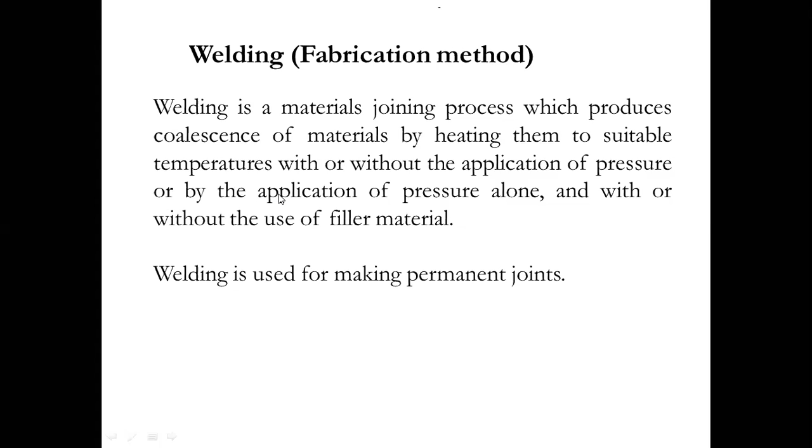So the next slide is the classification of welding process. The classification of welding process is based on the force or heat, based on the pressure or force you apply. If you use an electrical circuit, you call it resistance welding.

We had done one experiment called resistance welding. Do you remember spot welding? Yes, spot welding. So if you use an electrical circuit, and two copper electrodes, and if the joining process is due to the resistance towards the heat, you call it resistance welding.

If you use electrical arc welding, there are different welding processes. We'll see it in the figure now.

All of you make a note. The basic classification of the welding process is of two types: one is fusion welding and the other is solid state welding. If you attend any interview, they will ask you the difference between solid state welding and fusion welding, so you must be very clear to answer them.

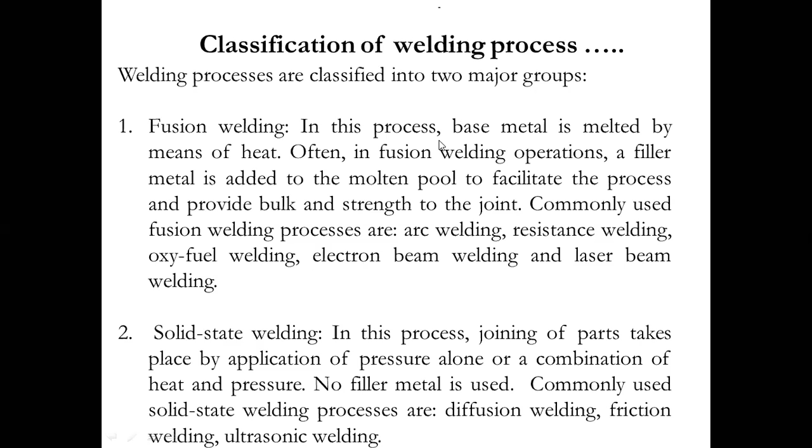This is not there in your syllabus. The chemical welding which comes under chemical reaction is thermite welding. So under fusion welding you have three types: electrical arc welding, gas welding, and chemical reaction.

Under electrical arc welding you have carbon arc welding, metal arc welding, and inert gas welding - that is TIG and MIG. Under inert gas welding, you use the gas here as a shielding material.

Shielding is nothing but protecting the welding area. Why do you protect the welding area? As the welding area is in a heated zone, because of the air, or contact with the electrode, or the atmosphere, there will be a zone called the heat affected zone. In this heat affected zone, there could be a change in mechanical properties, so you should take care that it does not alter the mechanical properties of the material.

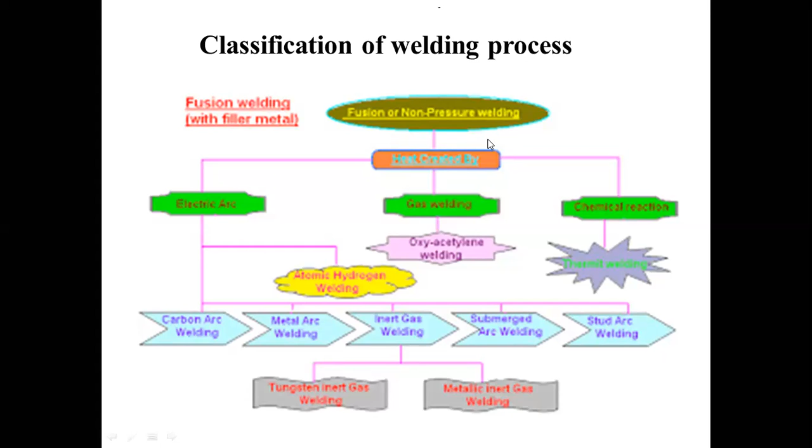Next slide is on gas welding and arc welding, the same thing is repeated here.

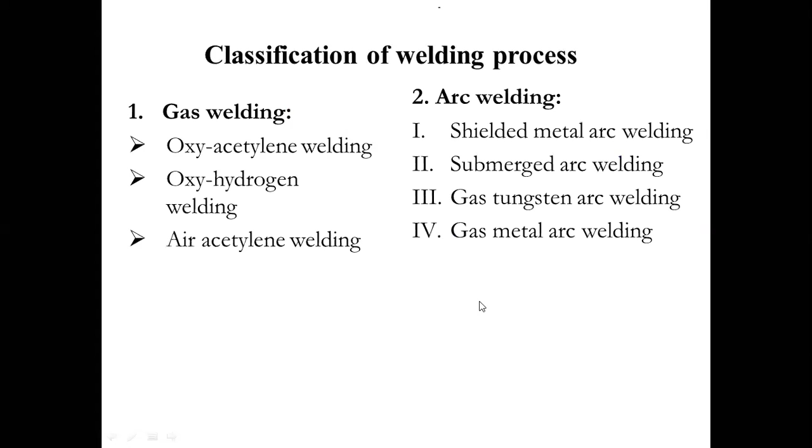Under resistance welding, you have resistance welding. We did one experiment using two copper electrode rods, holding two sheet metal plates under them. These copper rods were in contact with the workpiece, and you applied pressure by pedal. There was an electrical current passing through the copper rod, and because of that it heats up. This comes under resistance welding.

Resistance welding and solid state welding come under unit 4. In solid state welding we have friction welding, forge welding, diffusion welding, explosion welding, and the advanced techniques are electron beam welding and laser beam welding.

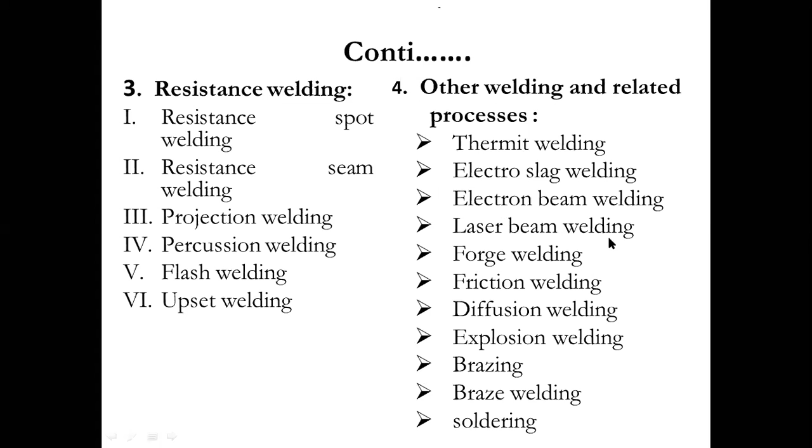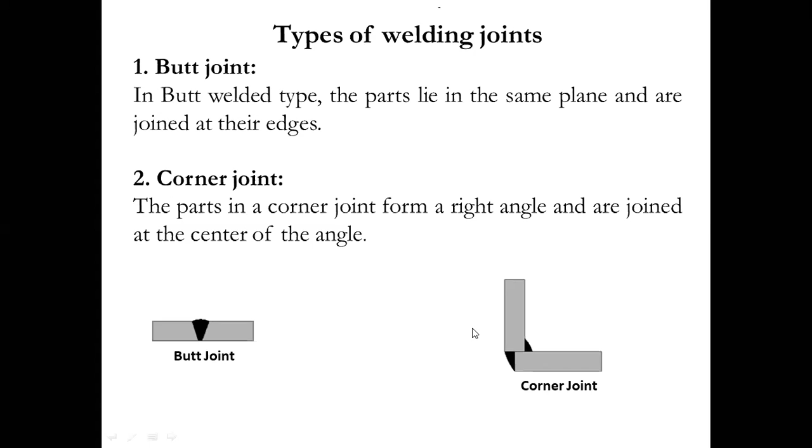In today's class we'll see gas welding. The next topic in this slide is types of welding joints. As we know, there are different types: butt joint, corner joint. In a butt joint you can give a V joint or U joint - the parts lie in the same plane and you join the two edges. In the corner joint, the two plates are at about 90 degrees. This is all we had seen in class.

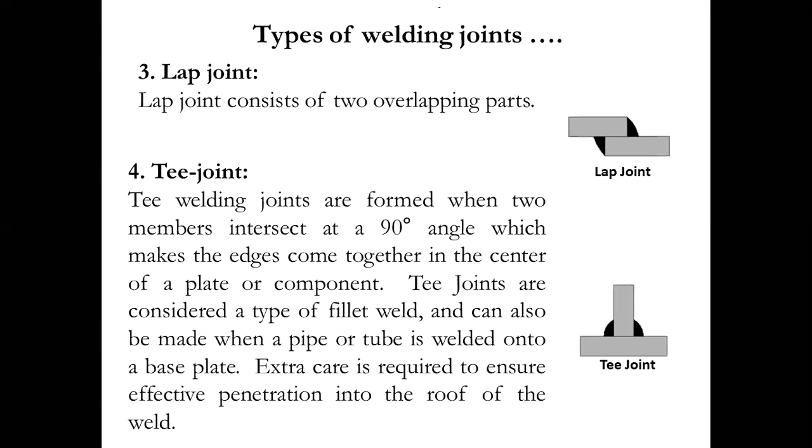Lap joint, two overlapping plates, which you did in spot welding - remember? T joint, please see the figure: T joint, lap joint. In the exam they may ask you to explain the different types of welding joints, so you should draw all these clearly: butt, corner, lap joint, T joint, edge joint. Everyone see?

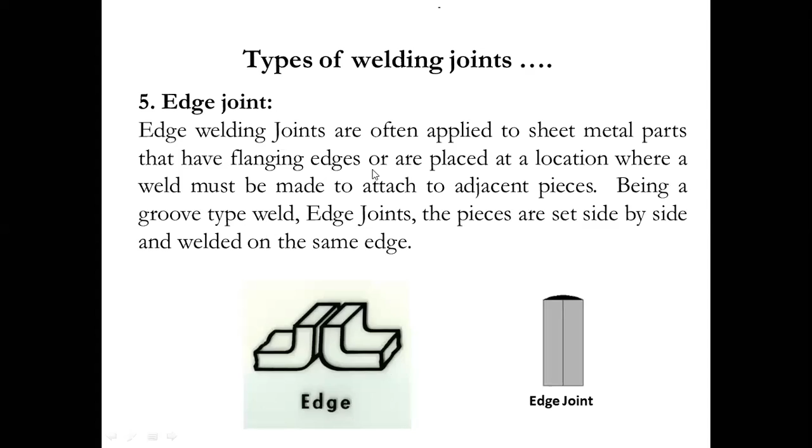And based on the position, there are different types of positions of the filler rod. There is horizontal position, vertical position, or overhead position. So based on the position, they will go for different types of welding.

So this is the welding terminology we had seen in class. Face of the weld, the bottom one is the root reinforcement, right? So this is the face of the weld, the distance between this edge to this edge.

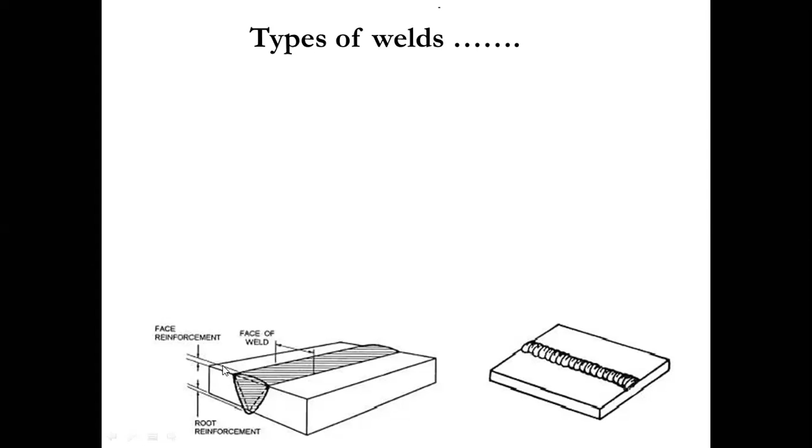All of you know this welding terminology. It's not much important, but from a knowledge point of view, you should know the link of the welding part.

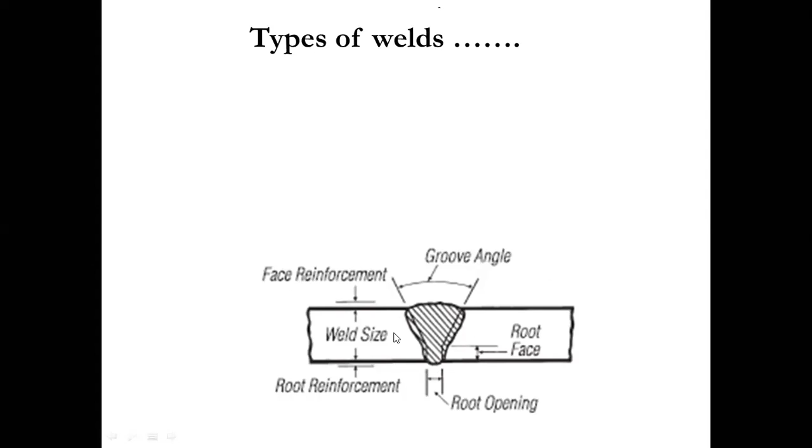So here you can see this is the welding area. The neighbored area, this area you call the heat affected zone. On either side, you will get two heat affected zones.

So the grains at the heat affected zone will start elongating from the surrounding or the edge of the welding area.

So in order to control this area, you will use the shielded gas, or you can use coatings on the electrode. And I think when you did electrical arc welding, the lab assistant sir removed the electrode rod, and it was written clearly that it was coated. So there will be a coated electrode rod to take care of this heat affected zone.

Right, so there are different types of weld. Please see this, this is a fillet weld. We had seen what is toe — toe is an intersection of the welded area and the base metal.

The intersection of two welded faces is root. So the two face, throat, toe, leg, root — all these are the intersections with respect to the welded area and the base metal.

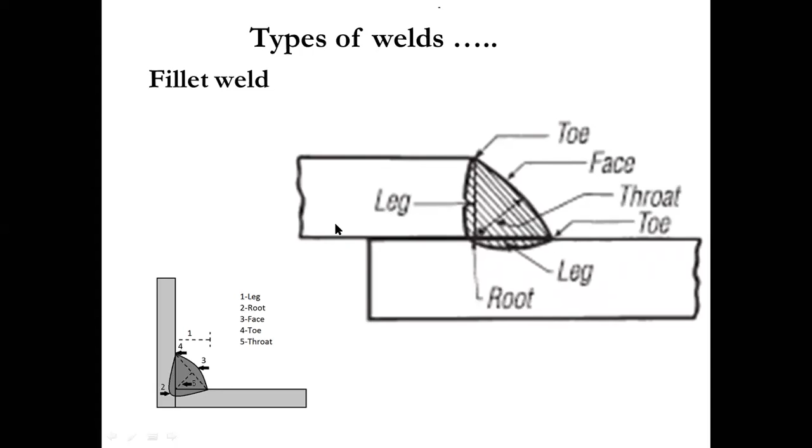So welding positions: flat position, horizontal position, vertical position, and another called overhead position. In this slide they have shown you the difficulty level, which increases from flat to horizontal to vertical, and overhead is very difficult.

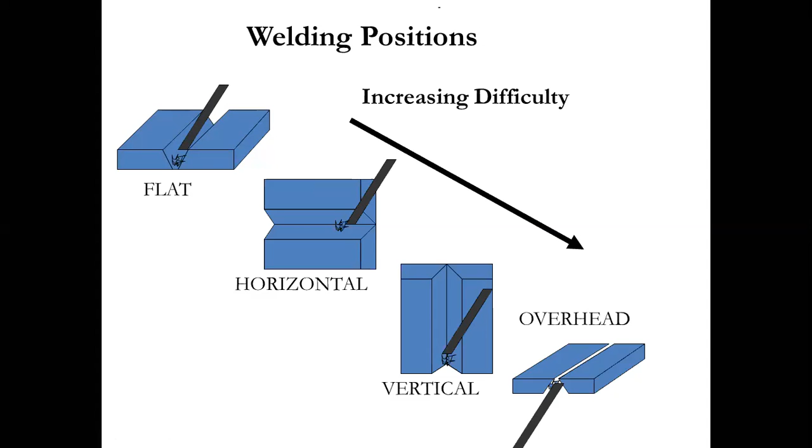So generally they do this overhead welding for the bridges.

So when you do the welding process, before doing it you will first prepare the welding joints, as we had done with 45 degree faces. So for the butt joint, you can do 45 degrees, single or double, single U, double U, based on the requirements they go for the preparation.

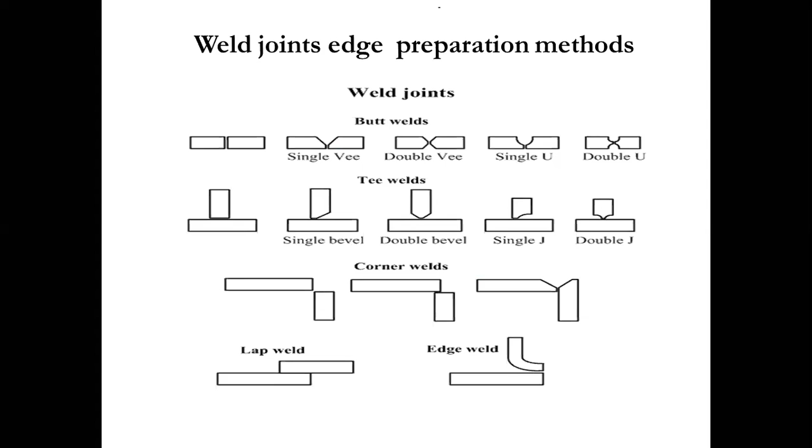Welding terminology, this we had seen: base metal, weld bead.

Yes, is it clear? Welding terms are not much important. Just see what is toe, what is the face or weld bead, what is root — all those, just see the definitions. They'll not ask you much from this.

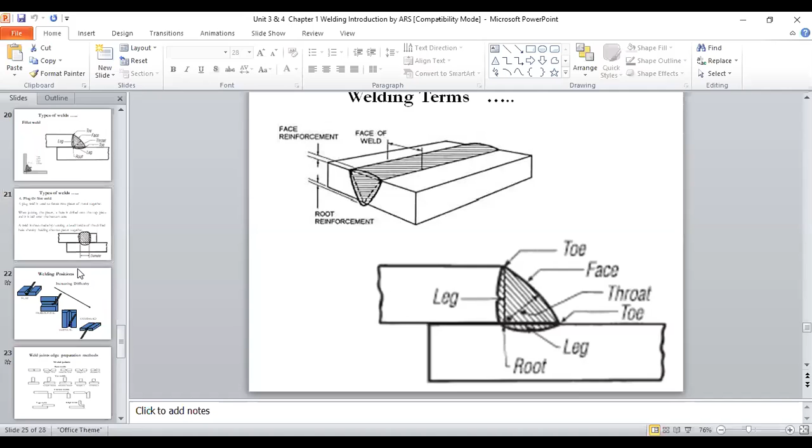Only they will ask you types of welding joints, or to classify the welding process. They may ask you about one welding method, either gas welding or electrical arc welding, but the main important questions are to classify or write the different types of welding methods.

Okay, so be clear, the definition of welding should be very clear. I always suggest do not write the definitions with your own words. Write the definitions from the textbook.

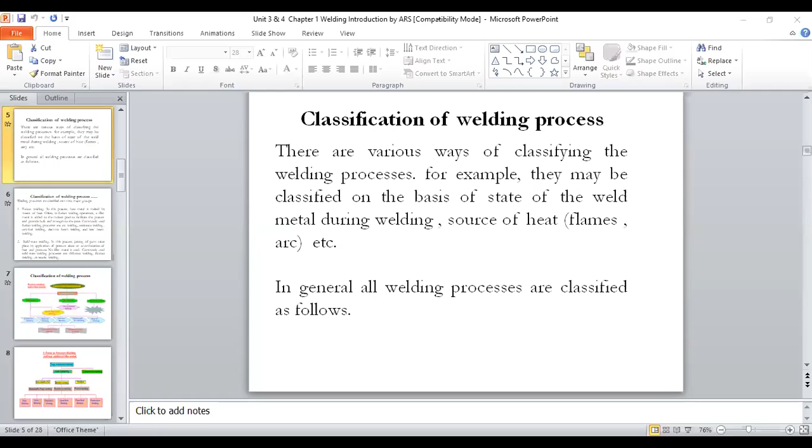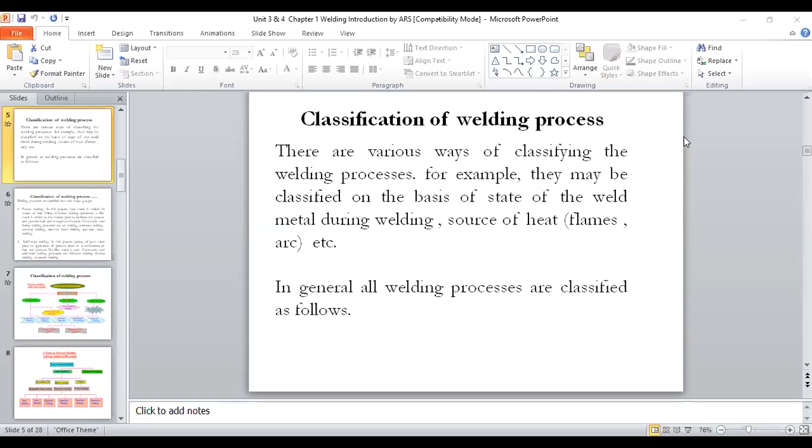So the next part in the third unit is gas welding. Can you all see this slide? Yes, ma'am. No, ma'am, okay, let me.

Can you see now? No, PPT is not visible. You share, how to share? Ah, now I got it. Yes, now? Yes, ma'am. Okay.

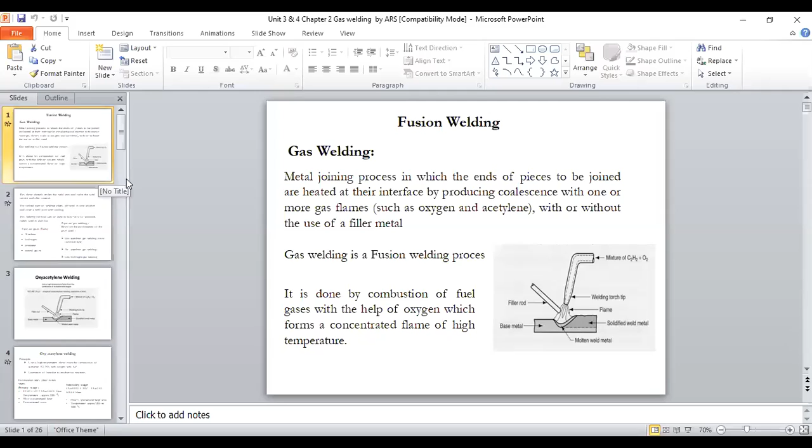Now the first slide is visible to you: fusion welding.

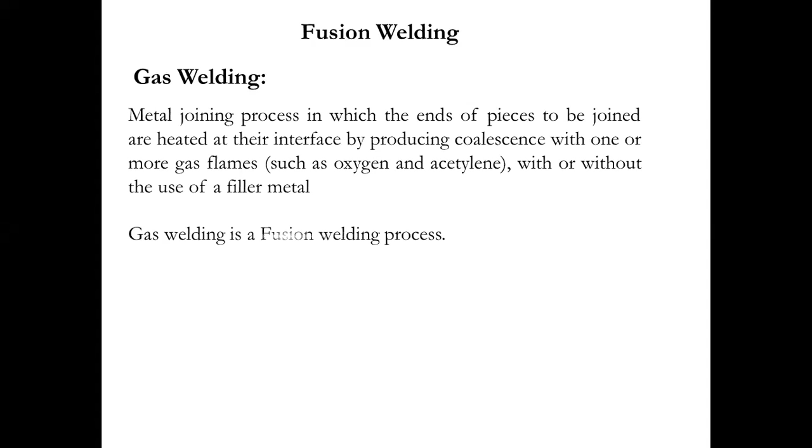So the basic, we had seen the slides before: welding is categorized into two basic types, one is fusion, and the other one is solid state. In solid state, you will use only pressure or heat, you will not use any filler metal. You will join the plates by application of pressure.

In fusion welding, you will join the two plates by heating them and filling the joint by the filler rod. The filler rod will fill the material and there will be a unit to feed the material. In gas welding, you can see in the diagram there are three parts: one is base metal, second is filler rod, the third is torch, you can call it welding torch.

This welding torch is heating the base metal. This filler rod, on the other side, is filling the material - it is the one which will join or merge the two plates. While this is heating, the filler rod will melt.

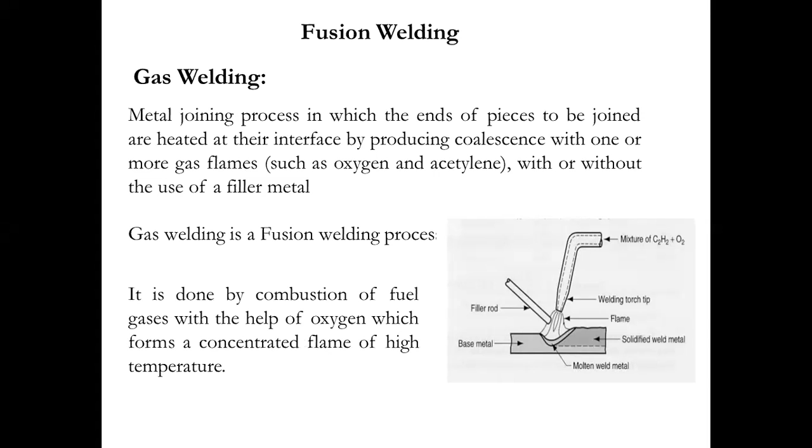So there is no electrical energy, just gas plus the filler rod and the base metal - these are the three major parts in gas welding. It is done by combustion of fuel gases with the help of oxygen. We'll see the equation now, how the combustion takes place between the oxygen and acetylene.

The types of gases used are acetylene, hydrogen, propane, and natural gas. Based on the gases, the types of gas welding are classified as oxyacetylene, air acetylene, and oxyhydrogen gas welding.

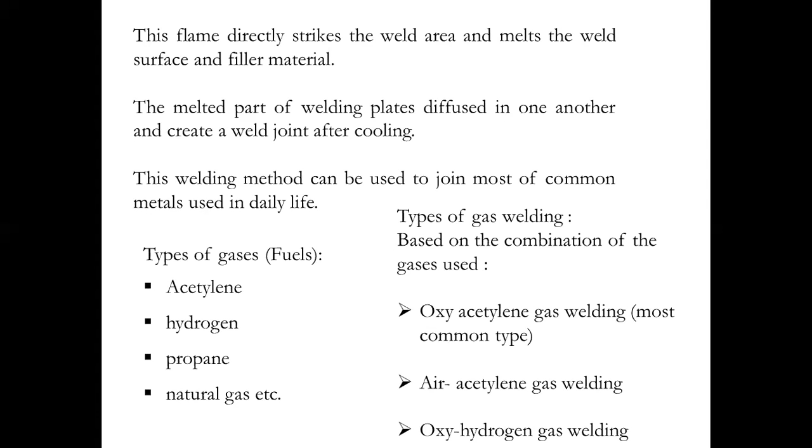Okay, so this is the figure. So I said the equation: C2H2 plus oxygen gives 2 times carbon dioxide or carbon monoxide plus hydrogen plus heat. At this stage, the temperature will be around 3200 degrees centigrade.

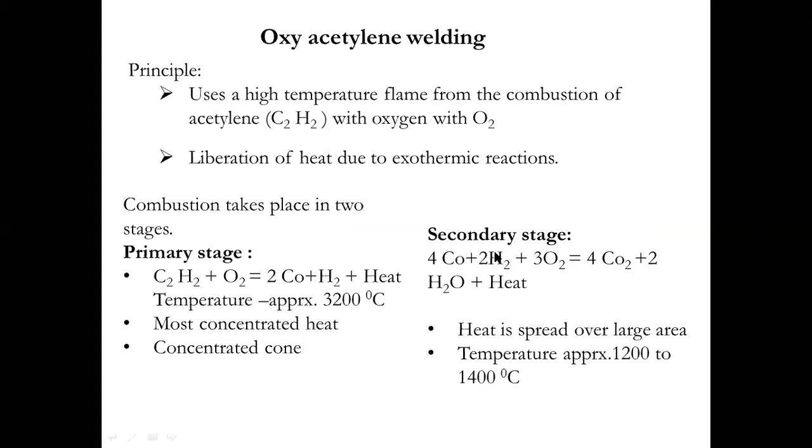Who is this writing? Stop writing now.

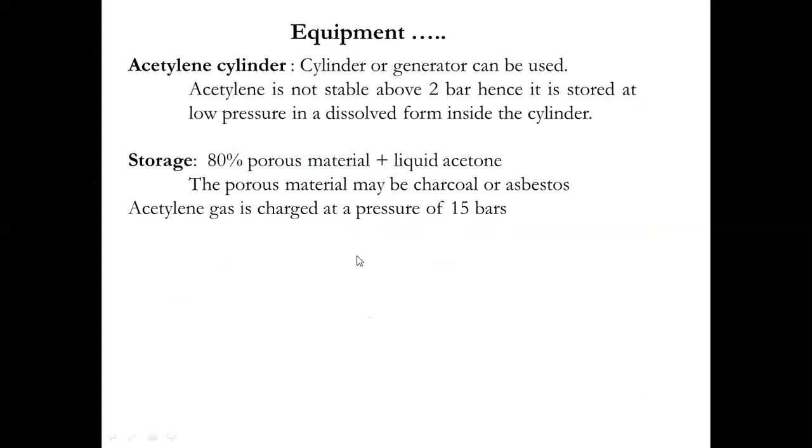So the acetylene cylinder will not be stable above 2 bar, hence you will store this acetylene under low pressure. So this acetylene you will put in the form of liquid state plus 80% porous material. Oxygen storage will be normal, but the storage of acetylene will be under a combination of 80% porous material and 20% acetone. So the pressure of the acetylene gas will be 15 bar.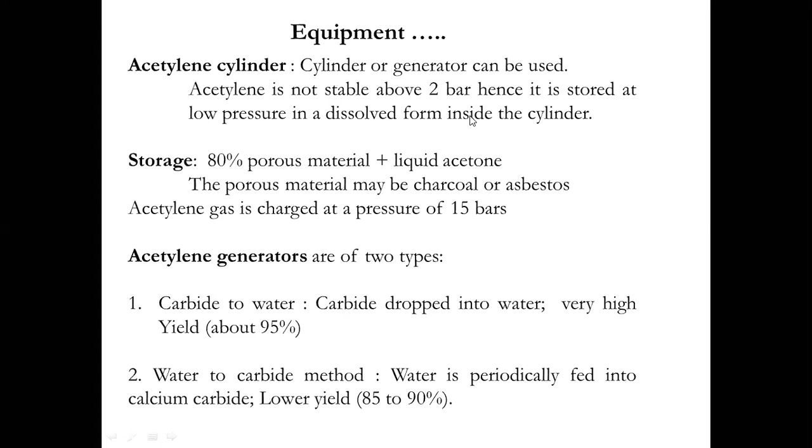The next slide is about the welding torch.

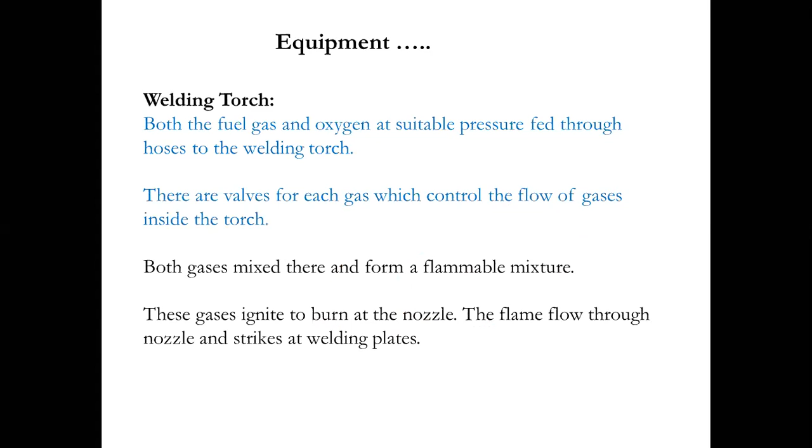Anyone can read for me? Neeraj, yes ma'am, read it. "Welding torch: both the fuel gas and oxygen at suitable pressure are fed through hoses to the welding torch. There are valves for each gas which control the flow of gases inside the torch. Both gases mix there and form a flammable mixture. These gases ignite."

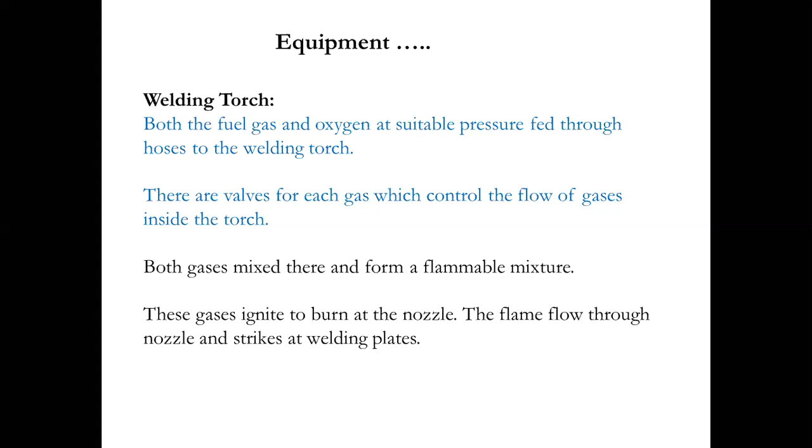From these two inlets, both oxygen and acetylene will enter and mix thoroughly in the correct proportion, and you will get the flame. This mixing of oxygen and acetylene will be in your hands. You can use more oxygen and less acetylene, or less oxygen and more acetylene, or both in the same proportion. If you use both in the same proportions, you get a neutral flame. If you use more acetylene and less oxygen, you get a carburizing flame. So the flame liberation depends on the composition rate of oxygen and acetylene.

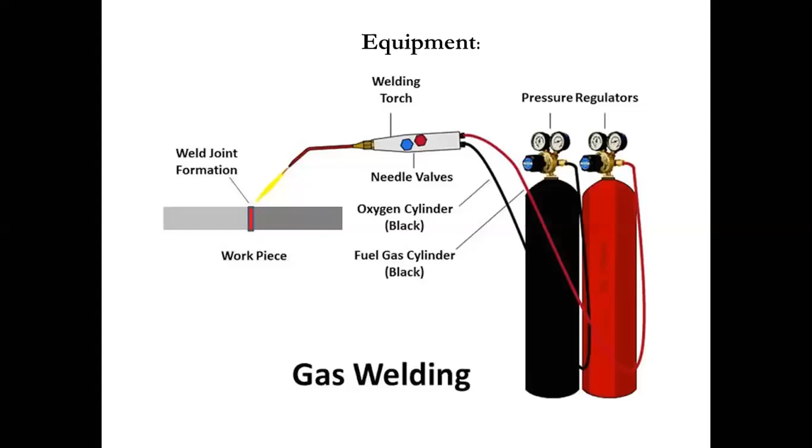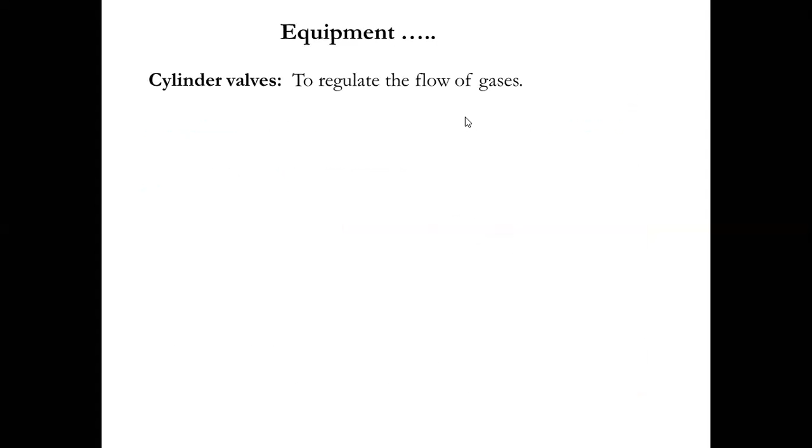Where are we? Yes. Neeraj, read. Neeraj, are you there? Yes ma'am, already. Cylinder valves to regulate the flow of gases. That's it ma'am, I can't see anything else. Wait, I have to click. Yes.

Specific coding: left hand thread and right hand thread. There will be two different threads. I have shown you an example how to remove the pin screw, right? So left hand thread will be used for the combustible gases, because the operator is always habituated to the right hand thread. Right hand thread is anti-clockwise direction, left hand thread is clockwise direction.

So that's why, in order to distinguish which is combustible and which is normal gas, the threadings will be different. For combustible gases, they use left hand thread; in our terminology, you remove it in clockwise direction. Right hand thread is for non-combustible gases. You can get this in your GATE or public service examination questions: they will ask which type of thread is used for gas welding cylinders. That is left hand thread.

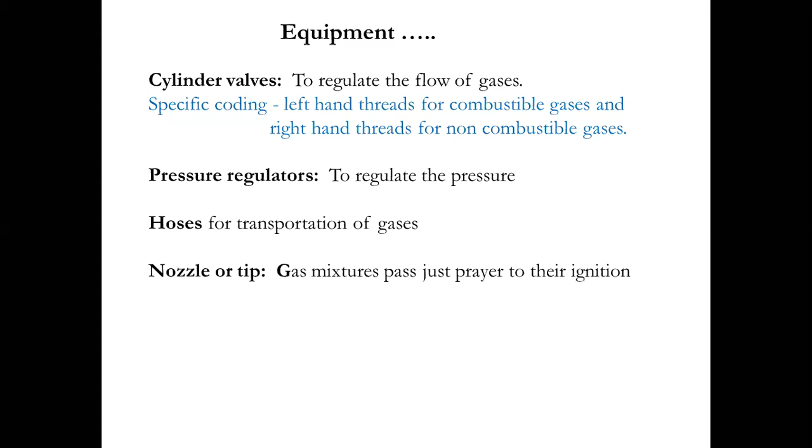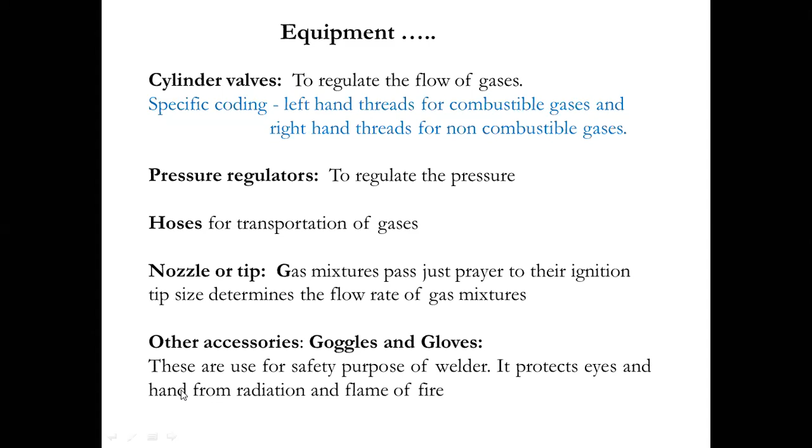Next, the equipment is cylinder valve, pressure regulator, hoses, nozzle tip. The fourth one is not necessary. These are the basic equipments we had seen in one figure; they are just describing each and every part. Now they are giving you the working, how the gas welding will work.

Balaji, read for me. Whatever I have explained till now, that's written here. In this process, all the equipments are connected carefully. The gas cylinder and oxygen cylinder are connected to the welding torch through pressure regulators, which you can see there. Now regulate the pressure of gas and oxygen supplied to the torch where they are properly mixed. The flame is ignited. Take care the tip of the torch is pointed downward.

So the nozzle tip should be handled very carefully; it should not be in contact with the workpiece. Remember that the torch tip should never be in contact with the workpiece. The filler rod will be in contact with the workpiece, or in electrical arc welding, the filler rod is in contact and you were removing it. But in gas welding, you will not put it in contact with the workpiece, because due to the heat itself the filler rod will melt and join.

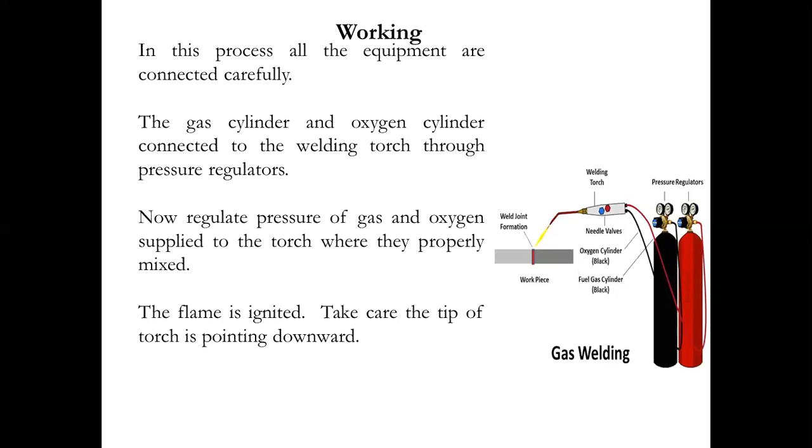This is already understood. We'll see the important essay question from unit 3: explain the types of flames in gas welding. Very, very important, please all of you make a note of it. They will ask you to explain the types of flames in gas welding. It is a guaranteed question, just like properties of sand in metal casting.

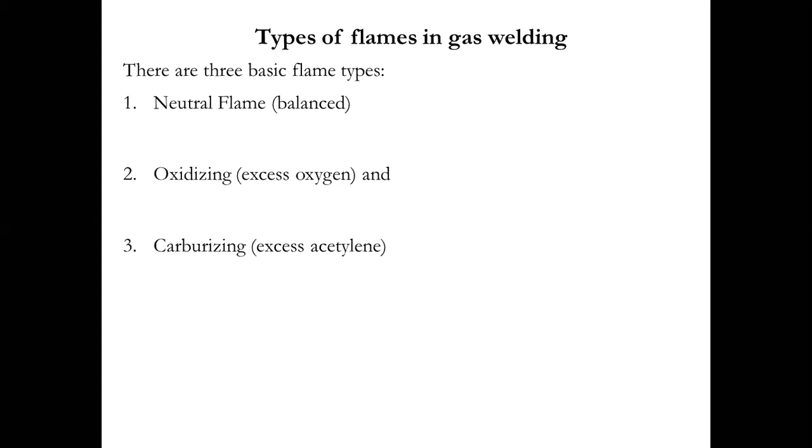The three different types of flames in gas welding are: neutral flame, when you use oxygen and acetylene both in the same proportions. Oxidizing flame is when you use more oxygen and less acetylene. Carburizing flame is when you use less oxygen and more acetylene. You can distinguish these three flames by their shape - there will be sharp corners or a hissing sound. In oxidizing flame, you will get a hissing sound. So we'll see those figures now.

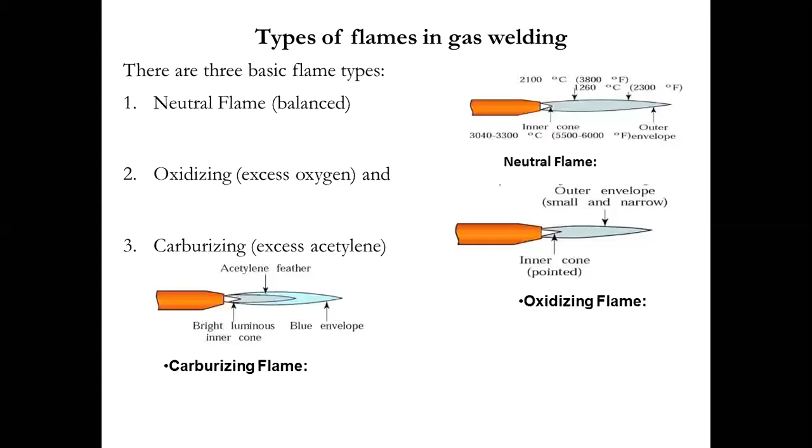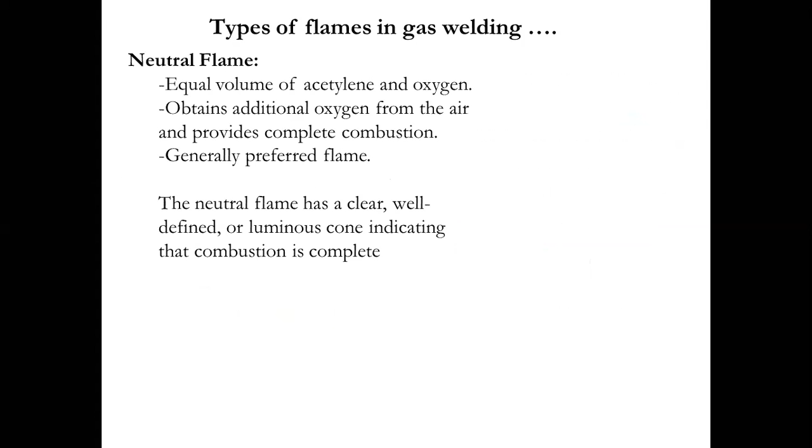Please draw this diagram clearly in your exam. Right now, let's describe each flame clearly. In the neutral flame, the volume of the acetylene and oxygen will be the same, and it obtains additional oxygen from the air and provides complete combustion. So the neutral flame is generally the preferable flame.

So we'll see for which type of materials they go for it. This neutral flame is used for mild steel, stainless steel, cast iron, copper, and aluminium. The color of the flame will be light blue, the outer envelope will be light blue, whereas the inner cone will be white. Light blue and white combination is for neutral flame.

The next one is oxidizing flame. Here you will use excess oxygen. The inner cone temperature will be about 3482 degrees centigrade. So this is the diagram. The materials they go for with oxidizing flame are zinc, copper, manganese steel, and cast iron.

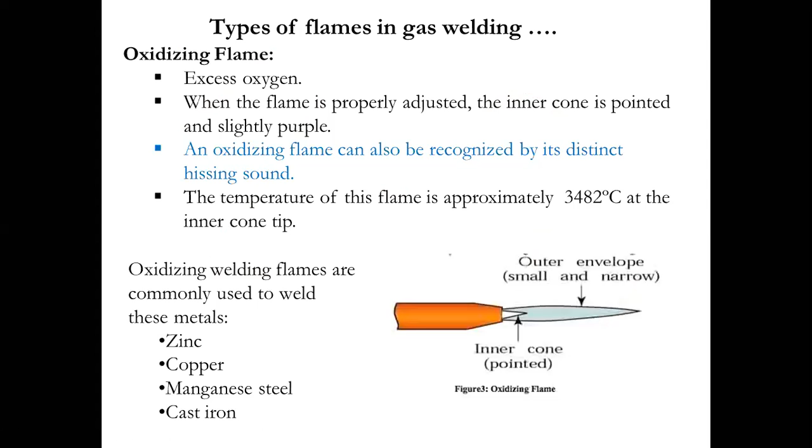And the color will be slightly purple. The third flame is carburizing flame. Here you will have excess acetylene. It is very easy to distinguish this because you will get three layers here: one is inner cone, one is feather, and the other one is the blue flame.

In lab, the lab assistant sir will show you these three different flames. By adjusting the valves, you can see these three flames very easily. The temperature of the inner cone, the white colored part, will be about 3149 degrees centigrade.

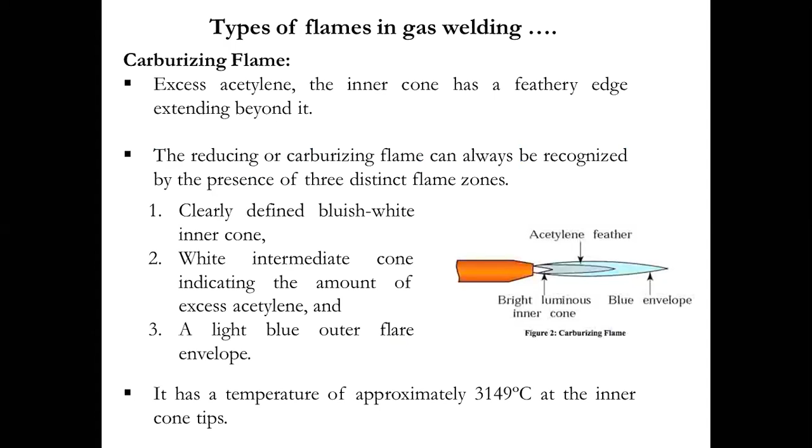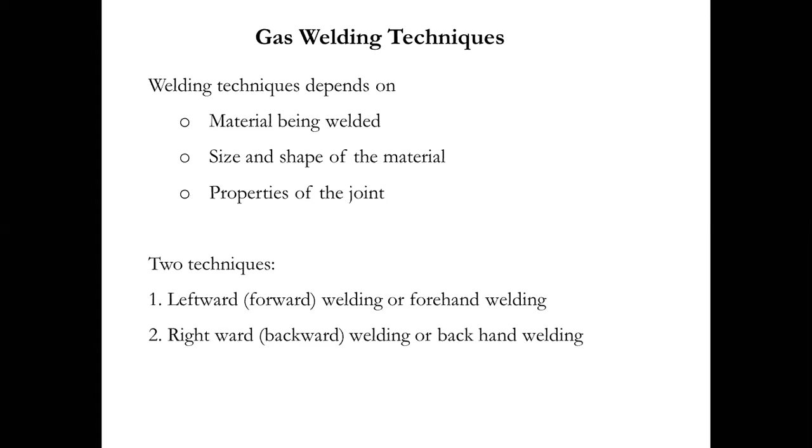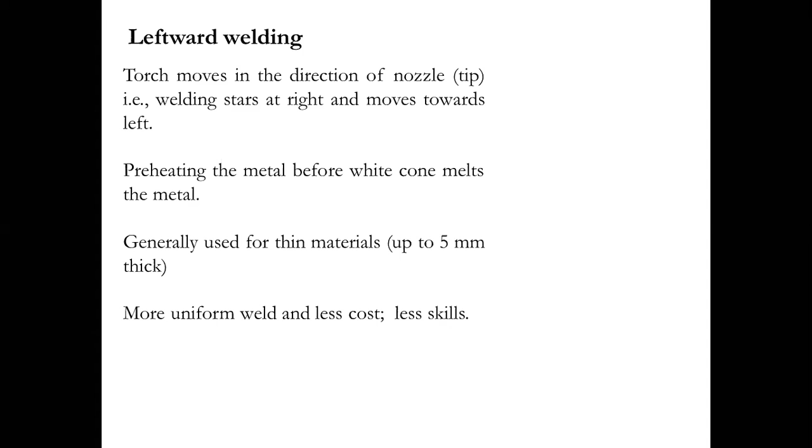Left hand technique is when I move the torch from the right towards the left, you call it left hand technique. Whereas in right hand technique, I start heating the material from the left and move towards the right, you call it right hand technique. So left hand technique is for thin materials, right hand technique is for thick materials.

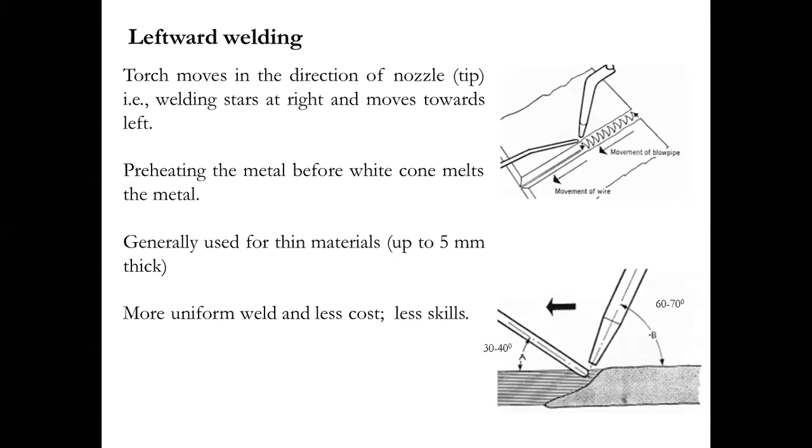You can see in the figure, they are moving from the right towards the left. The torch is moving from the right and the filler rod is opposite to the torch. So the torch is first heating and the filler rod is depositing there. In the figure below, they have given the inclination of the filler rod with respect to the base metal, and the inclination of the torch tip or axis of the torch with respect to the base metal.

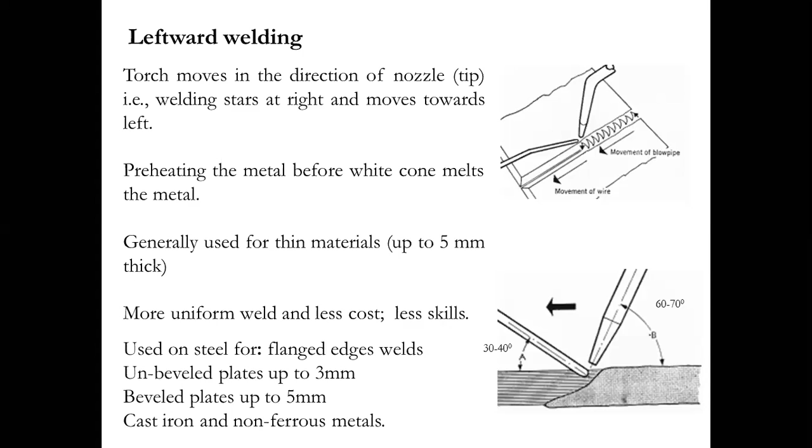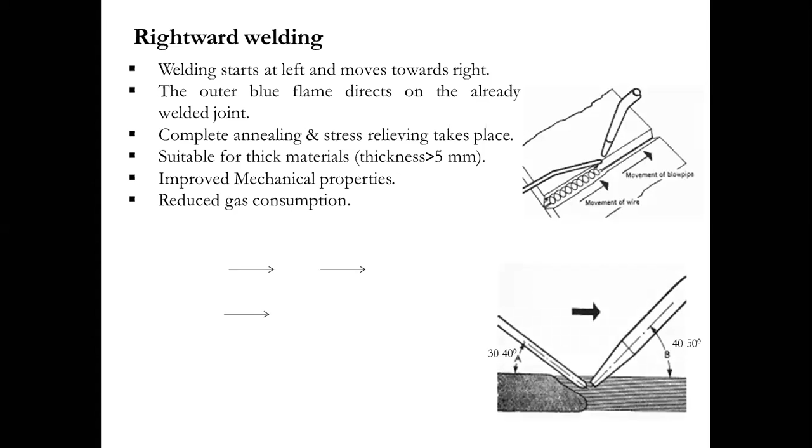Again, they have given you the inclination of the filler rod with respect to the base metal.

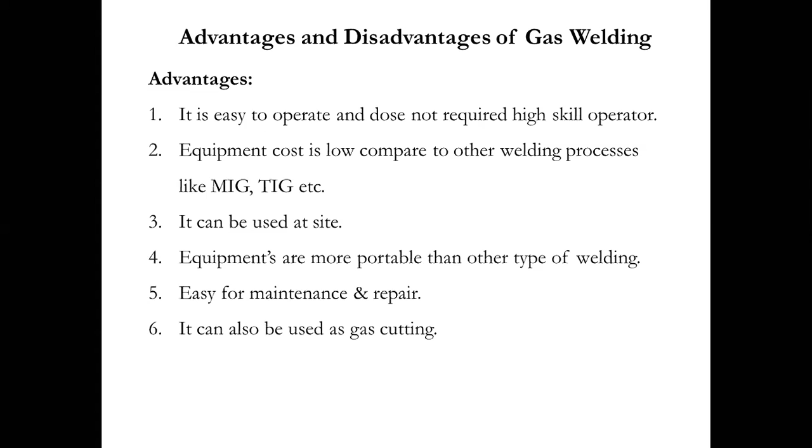You can even use gas welding for cutting purposes, but instead of using the filler rod, you use the gas with the torch. The design of the torch will be different. No filler metal is used, only the gas is used for cutting purpose. That is called gas cutting.

Now the disadvantages: it is a slow joining process, has low surface finish, and a large heat affected zone since you are heating it continuously, whereas in electrical arc welding or TIG welding you have got shielded material.

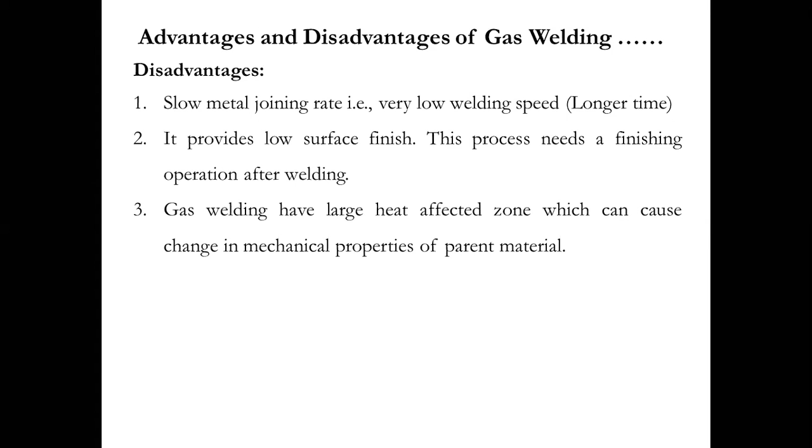There are higher safety issues. It is suitable only for soft and thin material, not suitable for highly reactive material. There is no shielding area or coating given, so you will have welding defects and the heat affected zone, which you cannot control here.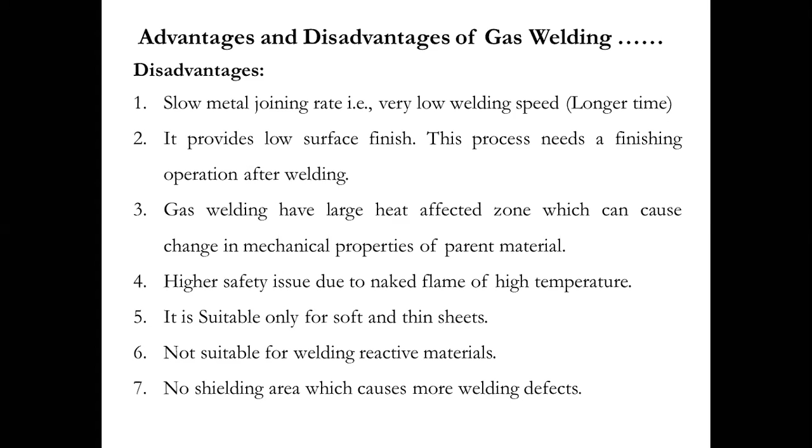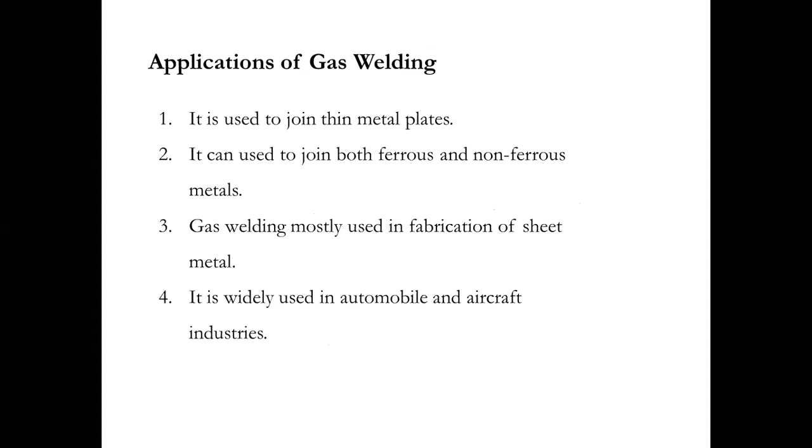Applications: it is used for thin metals, both ferrous and non-ferrous. Mostly sheet metals will be joined, used in automobile and aircraft industries. Now we'll see gas cutting.

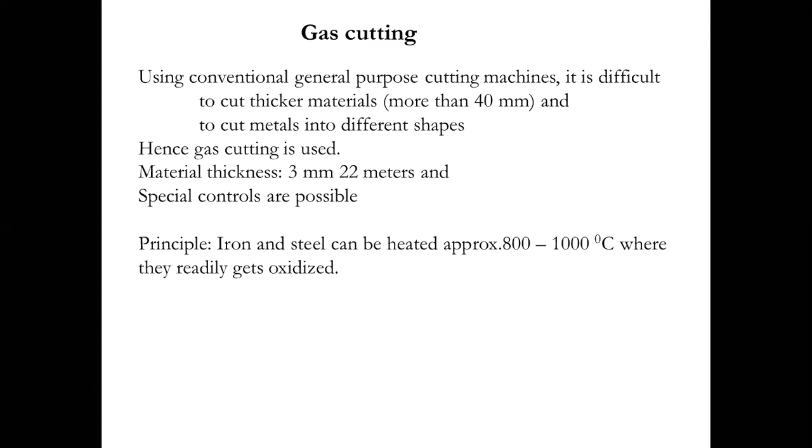This is the time now. Shall I explain gas cutting today or tomorrow? Neeraj? Explain, ma'am. Okay, explain now.

The gas cutting process is used to cut material from 1 mm or 10 mm up to 40 mm. There are different cutting methods.

In further semesters you will study this cutting process in detail. As we know, there is conventional cutting using the hacksaw method. There are non-conventional techniques like water jet cutting and abrasive water jet cutting. There is also laser cutting and plasma cutting. All these are done using advanced techniques.

If you use a hacksaw or normal conventional cutting, the surface finish will not be very good. Whatever the cut section is called, in technical terms it is called kerf. If the kerf width or cut section has a taper, you should go for a secondary finishing process.

Whereas in gas cutting, you can avoid this finishing process up to 40 mm. It can cut different shapes, from 2 mm till 40 mm. Now we'll see how the cutting process is done.

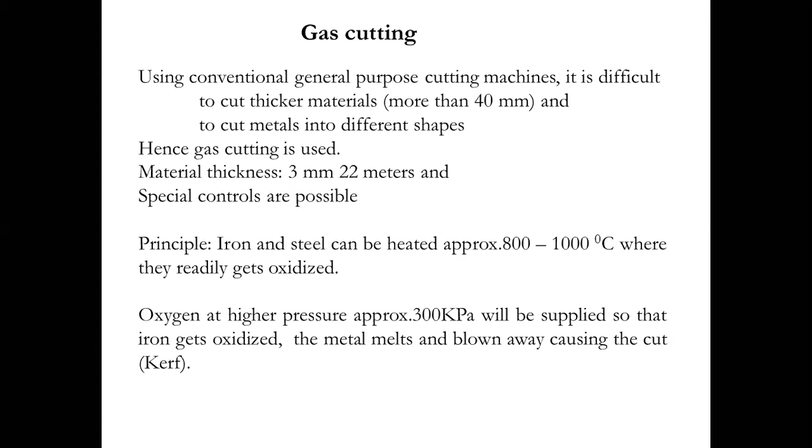Then they will slowly use the acetylene, increasing its volume. Initially, for the initial cutting, they open the oxygen cylinder first, then open the acetylene cylinder later. No filler metal is used here, only oxygen plus acetylene.

So you can see Fe plus oxygen gives Fe3O4. What is this Fe3O4? Neeraj or Balaji, what is the chemical name for Fe3O4? Please type it in Google and tell me. Ma'am, ferrous or ferric oxide?

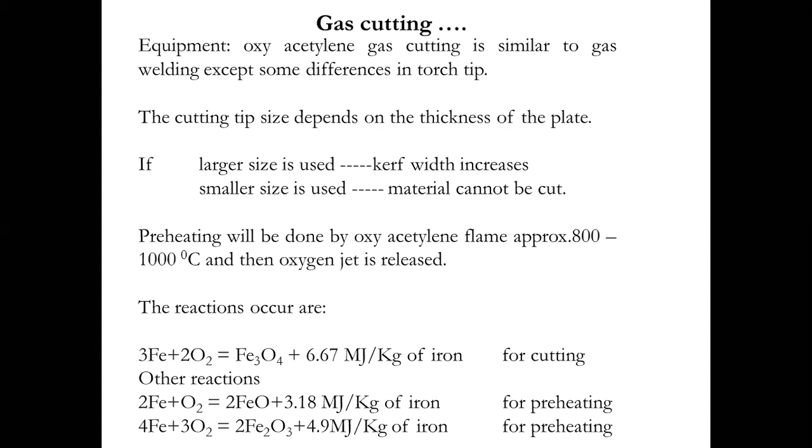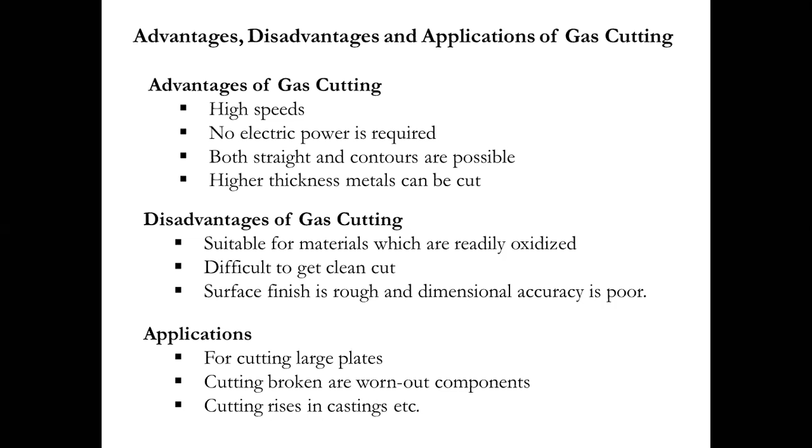Applications: cutting the larger plates, cutting broken or worn out components, cutting the risers. In castings we had seen yesterday's class projections called rat tails and swells - these swells and rat tails, they will cut it with the gas cutting.

That's it for today. Tomorrow we'll see electrical arc welding. Is it clear? Yes ma'am, clear, yes ma'am.

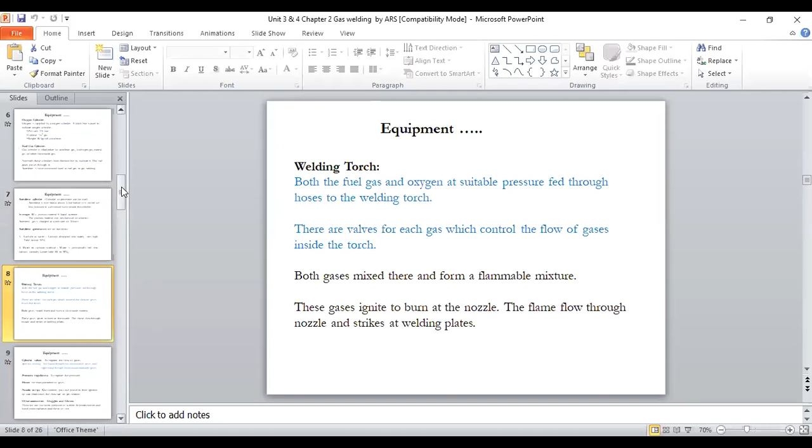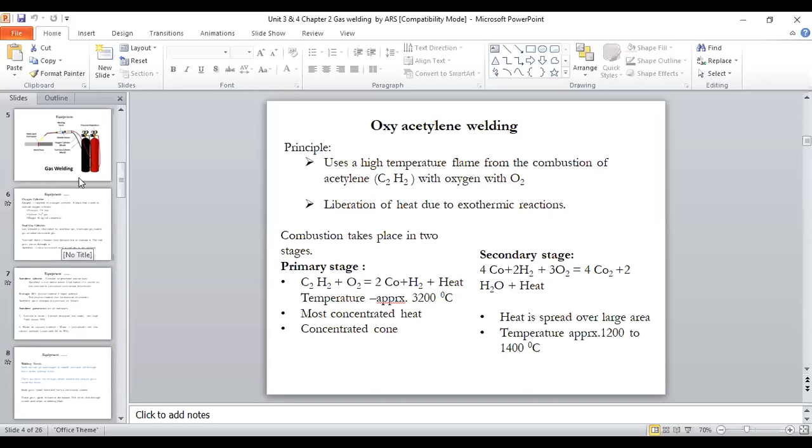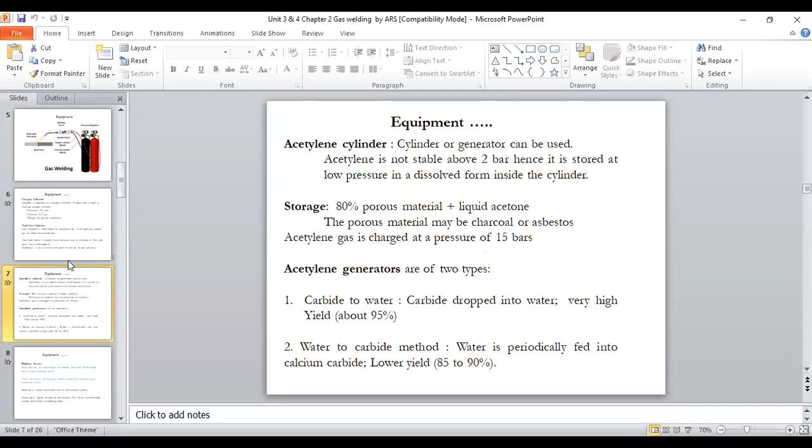So from gas welding, they will ask you types of flames - this is very, very important. They may ask you to describe or explain the gas welding equipment, so you should write the connection, how the acetylene and oxygen is connected, and write the chemical reaction by heart. There are two chemical reactions I have shown you, primary and secondary. In flames, please draw the diagrams clearly and mention the temperature ranges - three flames will have different temperature ranges. So flames are very, very important.

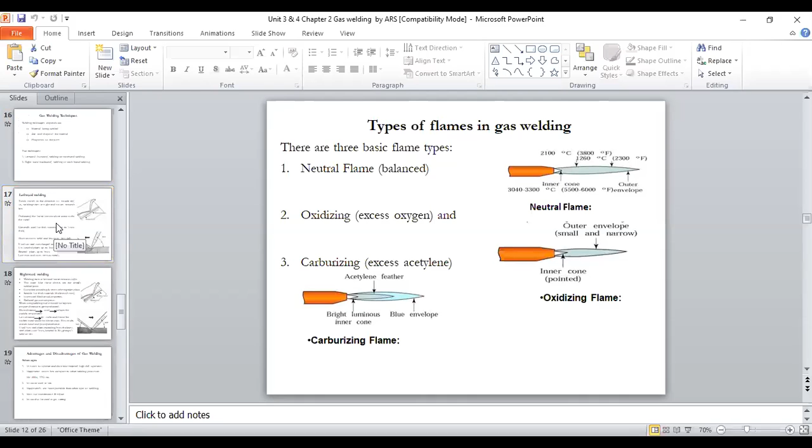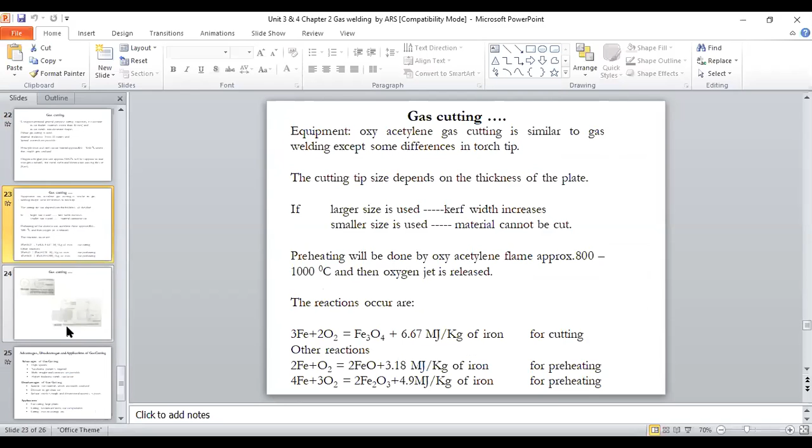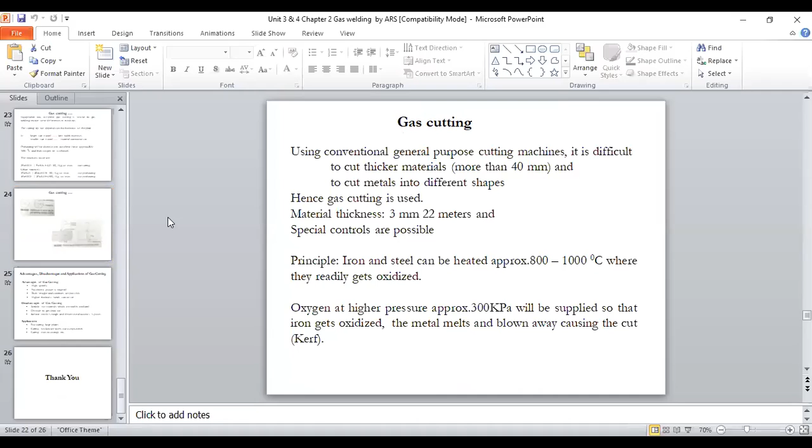They may ask you to write the techniques used in gas welding - left hand technique and right hand technique. Gas cutting, I think you may get it in short answer questions. Essay questions they may not ask you because very less information is given in gas cutting - it is cutting, it is not under welding. They are just giving you the application of gas with respect to workpiece. Please remember, gas cutting is not under welding - gas cutting is under the cutting techniques.